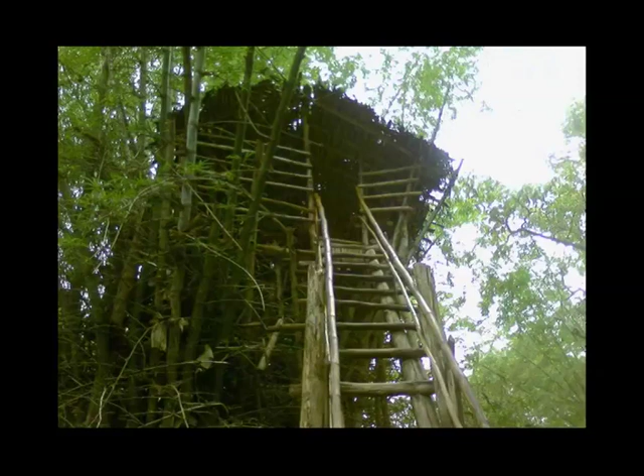So the first section is about why we need bioclimatic design to design green buildings. I'll start with the question: which of these buildings are the greenest? I've got a series of huts. They're all made with very local materials. They use very little energy because generally they have very little heating, if any. They've been made with local staff, so I think they're relatively green buildings.

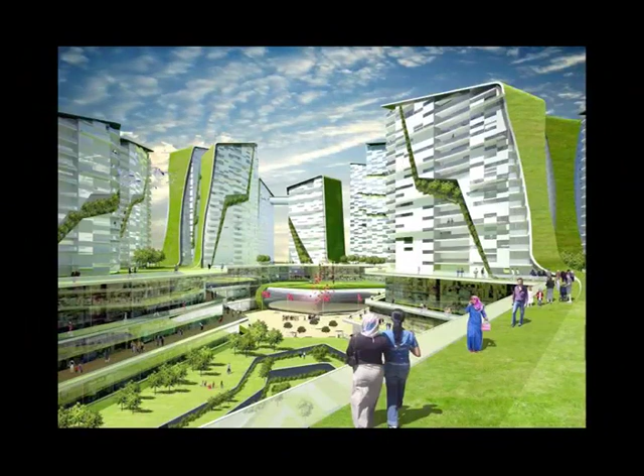Then I've got a series of buildings designed by my boss. These are skyscrapers. They're bioclimatic buildings, so they are very well shaded, very well lit, and they use little energy. This is a building in Singapore. And this is a competition. It hasn't been built for obvious reasons, but it's a sort of theoretical exercise, I would say.

Then we've got another series of buildings. Well, actually, I've just got one. This is a nuclear bunker in the north of England. And one could say that it's actually quite a green building because it's made essentially, except for the air conditioning systems inside of it, of natural materials; it's covered with green roofs.

So does anyone know which one of these buildings is the greenest? No? Well, it's the huts. And the reason why it's the huts is partly, of course, that they use very little materials. It's only local materials, but also there's very little heating, ventilation, and air conditioning in them.

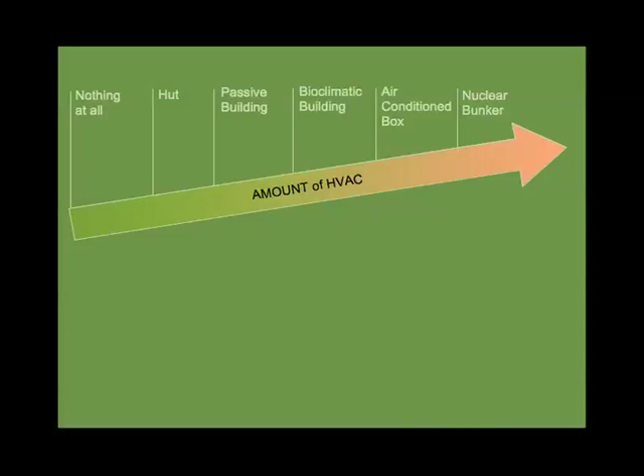So if you go on this scale from the left to the right-hand side, on the left you've got nothing at all. So imagine maybe in Thailand on the beach and there's no building. Then we've got the hut through the passive building. The passive building doesn't have any heating or cooling. The bioclimatic building, which I believe is the next step, is a building which is air-conditioned and which has heating and ventilation, but which is made in a way which is going to reduce its own energy use.

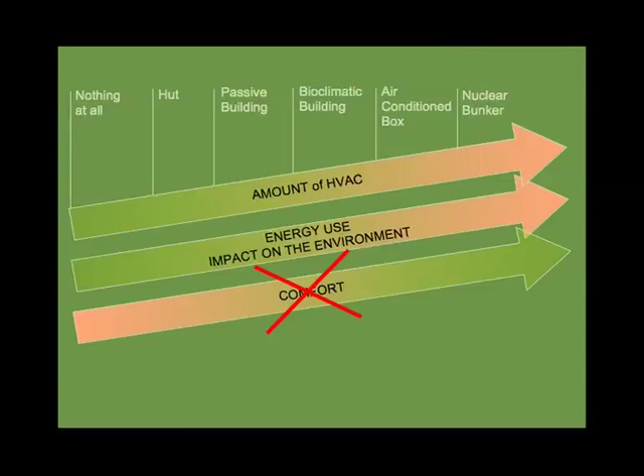The next step is the air-conditioned box; a lot of buildings in Dubai are currently being built like that. And finally, we have the nuclear bunker, which has probably the most heating and air conditioning that you can ever imagine. So the more you go towards the right, the more energy use you get. But one could say, well, if you get more energy use and better ventilation, etc., then it should be more comfortable. We think that it's not the case, because if you're in a bunker or in a glass box, then you're probably not so comfortable.

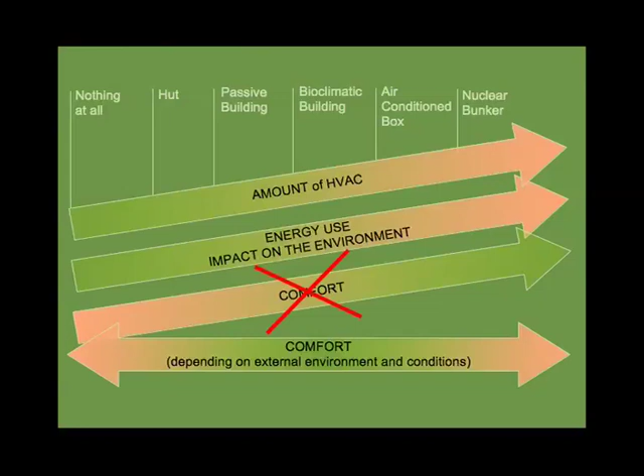So we're not only talking about energy saving when designing a bioclimatic building, we're also talking about buildings which are comfortable, which are healthy, and good for the occupants. Therefore, more valuable. So now we're going to go through the principles of bioclimatic design, and Maria is going to present on this.

One of the things that the presentation begins with is the definition of the bioclimatic design. You will allow me to sit, please. Right.

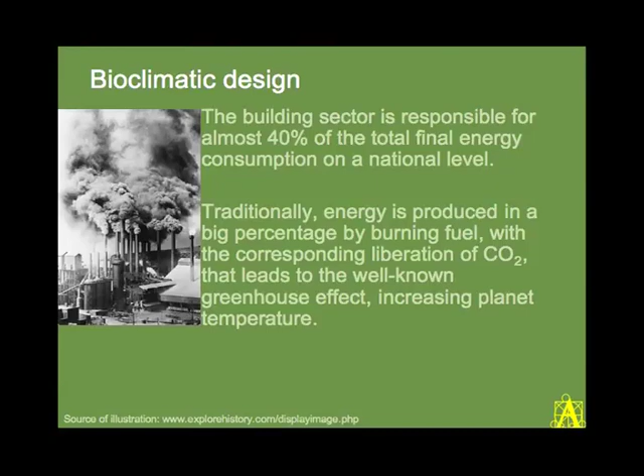What is a bioclimatic building? And why do we deal with them? One of the reasons is that the building sector is responsible for almost 40% of the total energy consumption on a national level. And energy was produced by burning fuel, and you can see the image, which is rather horrid. The corresponding liberation of CO2 leads to the greenhouse effect.

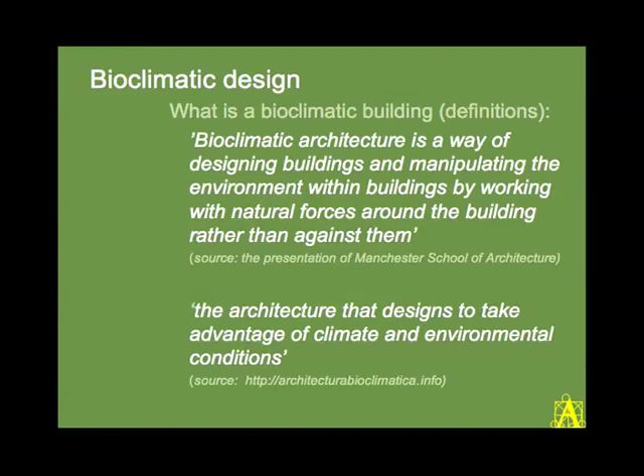We begin with two definitions of bioclimatic architecture. It is a way of designing buildings and manipulating the environment within buildings by working with natural forces around the building, using them, actually. It's from the Manchester School of Architecture. Architecture that designs to take advantage of climate and environmental conditions is another definition that I really liked.

And what is very interesting in almost all building technologies and systems is that we don't really discover them now. Actually, we rediscover them now, because in antiquity they existed. The Greeks had their houses oriented towards the south. Socrates lived in a solar house. Aeschylus said that you have to be stupid to live underground. Well, actually, we can have a discussion here, because underground buildings are very comfortable and very modern today in many respects.

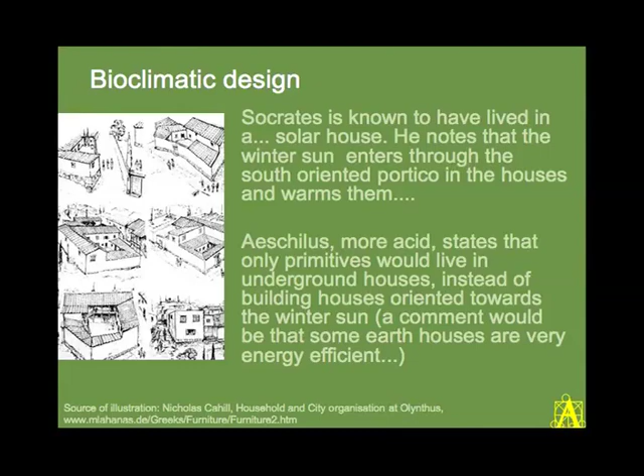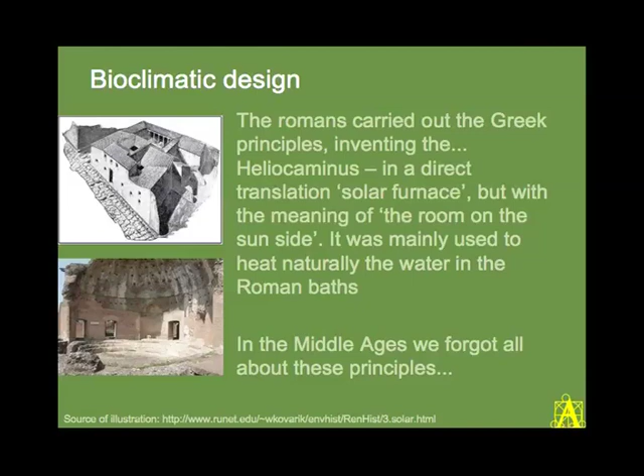Going a little bit further, the Romans carried on the Greek principles with the heliocaminus. A direct translation would be a solar furnace. Actually, they were heating their water for the baths. We forgot about this principle in the Middle Ages and reinvented it in the previous few decades.

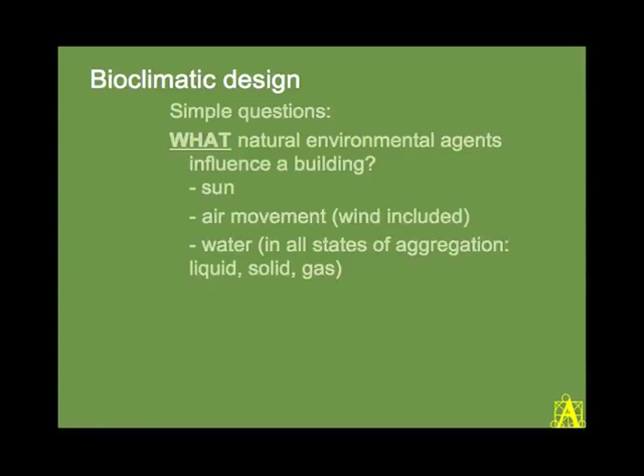So what natural environmental agents influence a building from the bioclimatic point of view? Sun, air movement with the wind, water in all states of aggregation: liquid, solid, and gas. We have to build using them and helping ourselves with the benefits that these environmental agents bring us. Also, vegetation, plants and animals help us.

So you have all these presentations within your folders, so I can gallop through the presentations because it's a very dense day.

Sun, air, movement, water, and biological agents, I said, with their advantages and disadvantages: health, hygiene, natural ventilation, which again means health, natural cooling, which again means health, health brought to us from the plants, and in all the first three situations, we help ourselves to the natural energy that can be produced by using these agents. And of course the disadvantages, because we have the thermal discomfort, we have storms, we have floods, we have deteriorations in all the cases of

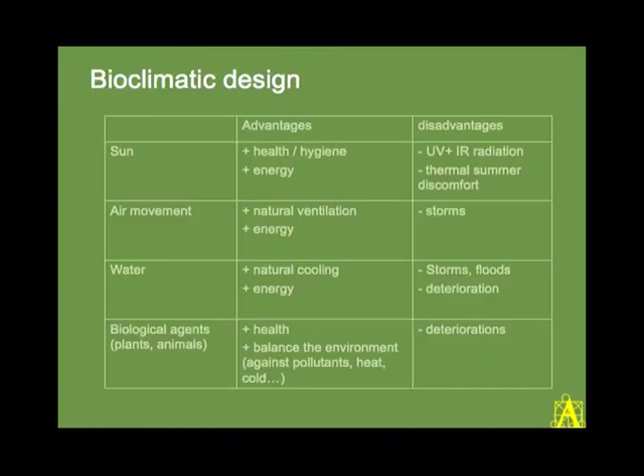misuse of these agents. And so, sun, air, movement, currents and winds, water, landscape, vegetation, all determine the location, the orientation, and the geometry of the building. The building's position, orientation, and geometry should be determined by these agents, using them for us and not against us. The architecture has an influence over the energetic performance of the building; the geometry of the building and of the envelope, and the building materials and structures determine the thermal behavior of the building.

The images that I have taken, and you can see the source of illustrations, are very explicit. You can see how a building can be built in the vicinity of vegetation. You can see how the wind passes over and not through the building. You can see how during the winter time, sun goes in the house through the leafless branches, and during the summer, how the shade is protecting the building against the sun. You can see how the accumulated heat during the day is given back during the night to the environment.

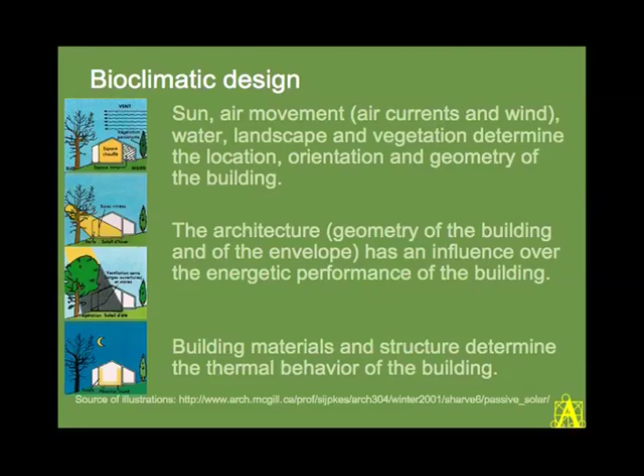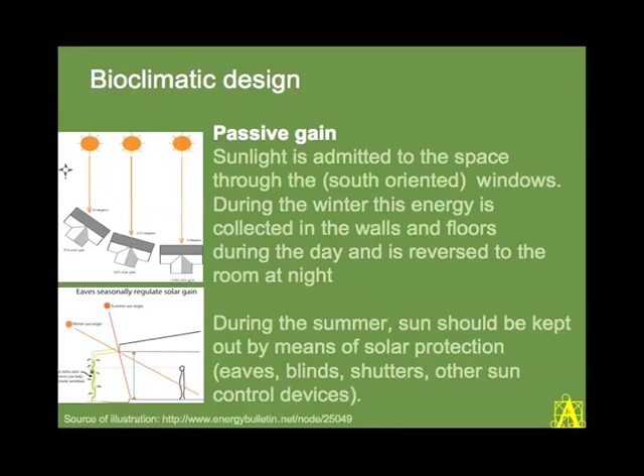Passive gain. Sunlight is admitted through the south-oriented, mostly sun-oriented windows, and you can again see the positions of a utopic building. During the winter, energy is collected in the walls and released at night. During the summer, sun should be kept out by means of solar protection, and in a very simple way, by just drawing the two rays that represent the winter sun angle and the summer sun angle, you can actually design in a most simple way the solar protection for the summer and the possibility of entering the sun during the winter.

And of course, I couldn't resist the temptation of showing that actually vernacular architecture, and from there on even civilian architecture, Romanian architecture, because we have this workshop here, has always used, and not only Romanian architecture, all the vernacular architecture uses principles of bioclimatic design, because they had to build with the nature, not against it. The use of passive systems is the most efficient way of taking advantage of natural resources.

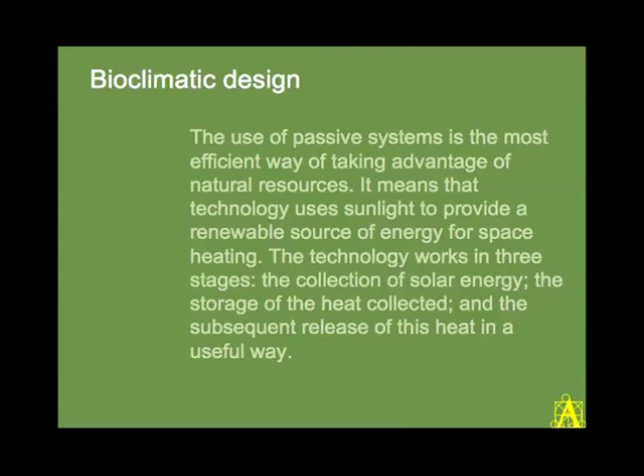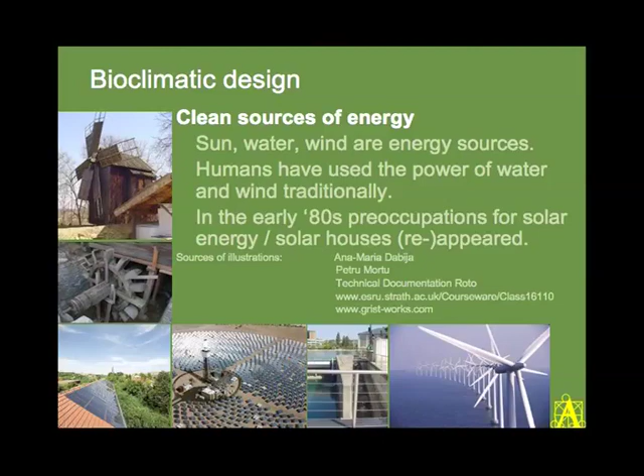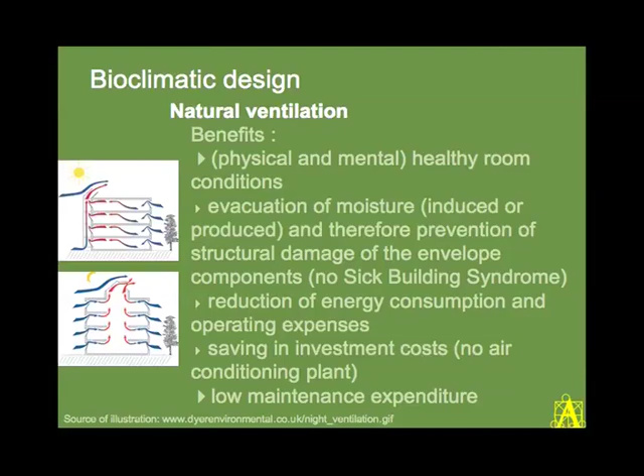Technology uses sunlight to provide renewable energy, and the way the technology works in stages you can find in the slides. Not exactly bioclimatic design, but I did say that we use water power, solar power, and wind power in order to produce power. And we can see them here in the slides in the traditional and in the contemporary way. About natural ventilation, the benefits are physical, mental, and more about natural ventilation will be presented. So this slide is just a flavor of something that's going to come a little bit later.

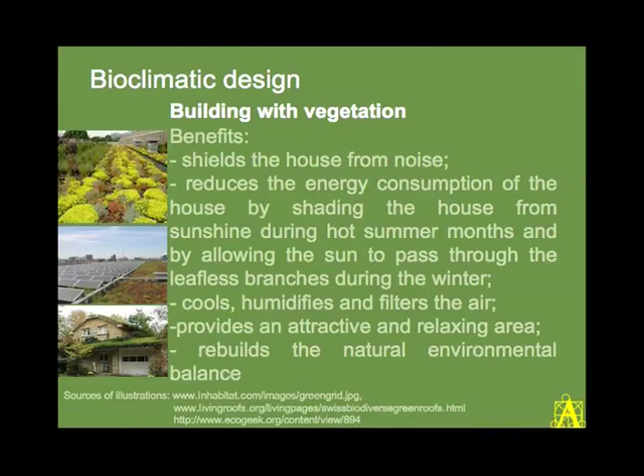But building with vegetation brings a lot of benefits: shields the house from noise, reduces energy consumption of the house by shading the house, as I mentioned before, cools and humidifies and filters the air, provides an attractive and relaxing area. I would very much like to have a coffee in the first slide's location. Rebuilds the natural environmental balance, logically, because it brings back the plants and the small animals that were in that environment.

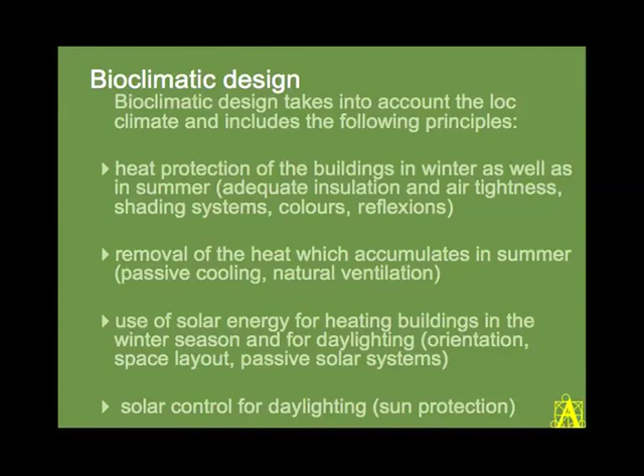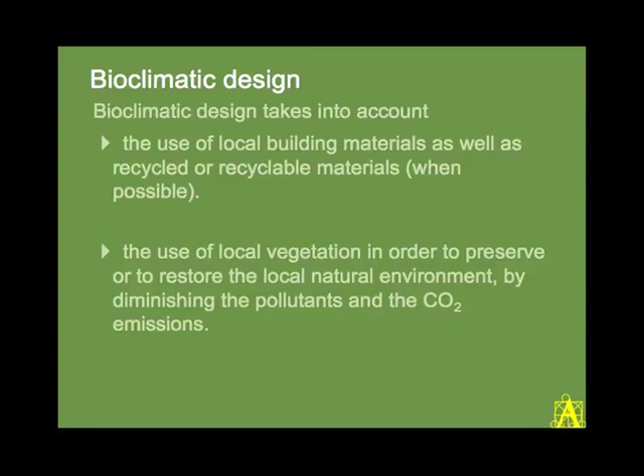Bioclimatic design takes into account local climate and includes the following principles: heat protection of the buildings in winter as well as in summer by adequate insulation, air tightness, shading system, colors, reflections. Removes the heat which accumulates in summer by passive cooling and natural ventilation, uses solar energy for heating buildings in the winter season and for daylighting through orientation, space layout, passive solar systems, solar control for daylighting, sun protection, the use of local building materials, which is very important, as well as recycled or recyclable materials whenever possible, the use of local vegetation in order to preserve or restore the local natural environment by diminishing pollutants and CO2 emissions.

So in conclusion, bioclimatic architecture is an evolved version of popular architecture, vernacular architecture, accomplished with contemporary means, which means building techniques, advanced energy concepts, and modern mechanical devices. This is a scheme, and thank you.

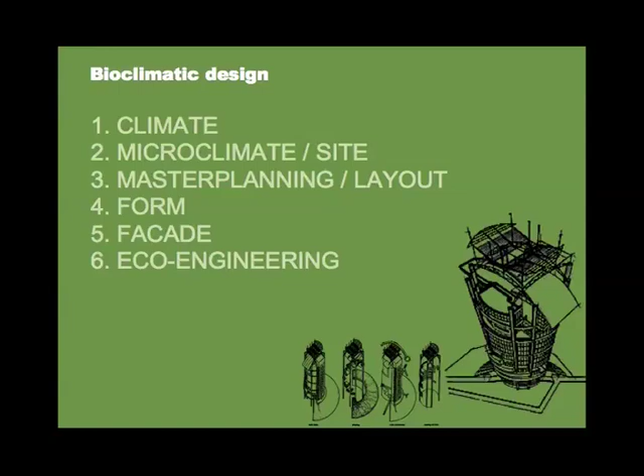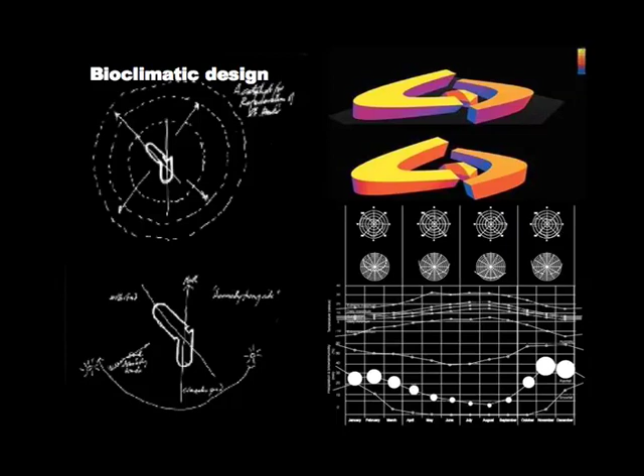Then we do some shape studies, some form studies. And the final thing, we might do a little bit of simulation of how much sun we get on the different parts of the facade or how much wind arrives on the facade, to understand in more detail how our building behaves. That happens last. The first thing we do is look at the climate locally.

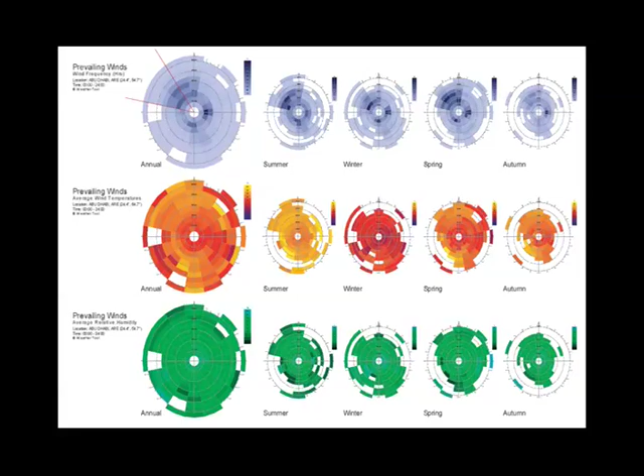In this particular case, the result was that there is probably not such a strong relationship. The second line here looks at direction of wind and temperature; the darker it is, the hotter it is. We saw there wasn't really much relationship between wind temperature and wind direction. It's not the case everywhere; it's very different in the UK, for example. The one at the bottom looks at relative humidity and wind direction. In many places you may have northern winds being colder, and you might want to take advantage of that so your building catches that cold wind when it's too hot.

These are further studies. All these studies have been done with a software called Ecotect. That's the one we use in our office. You might want to investigate other tools; it doesn't really matter what you use. I quite like Ecotect because I think it's quite a complete tool. It does everything I need at the early stages of a project.

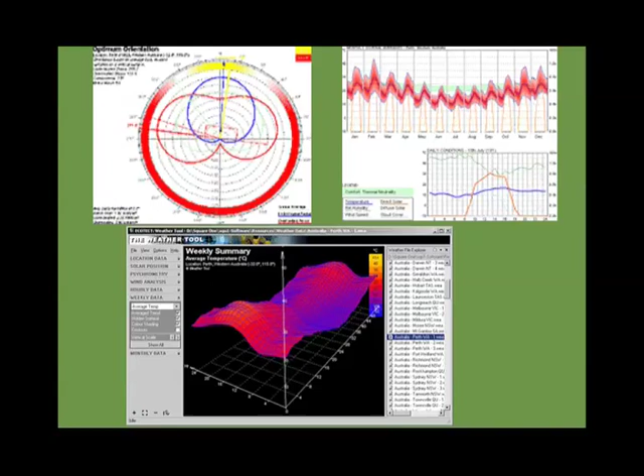If I'm going too slowly, please look really bored or do something that indicates that you know all of it.

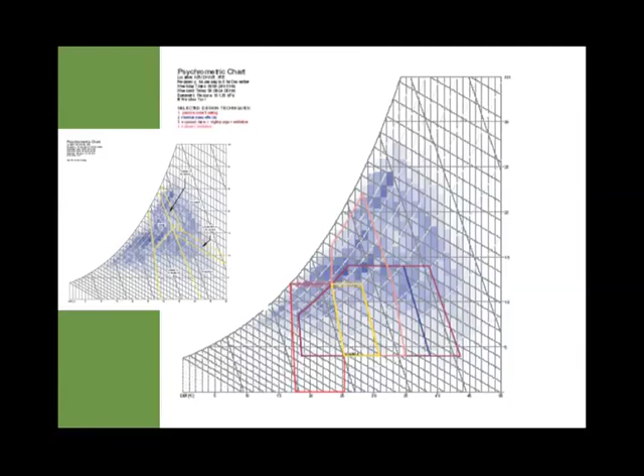So to be able to get climate information, there's a variety of sources, as well as many of the software that we're using, and this is just a few of them.

I don't want to do advertisement. If you investigate, you will find there's a lot of other types of software that can be used. But the software that you can use to do building analysis always tends to have climate data, climate information. It might not have climate for the area which you want to study.

And if that's the case, you need to go to the Department of Energy website, the American website, which has an unbelievable amount of information on climate, and it has all sorts of climate files that you can download for all around the world, really.

Then there's another software which is called Meteonorm. Meteonorm is very useful. The software itself is geared to do climate analysis, so that's the only use of the software. What it does is that it has a database of information on climate data for different areas around the world. But if it doesn't have certain information about a certain area, it kind of

averages the areas around it, which you've got to be very, very careful about, because of course, if you're looking at wind data and you have a large mountain near your site, you don't really want average information between two different sites. What you want is the specific location which you're studying. So I think Meteonorm is a fantastic software, but it's important to be quite careful.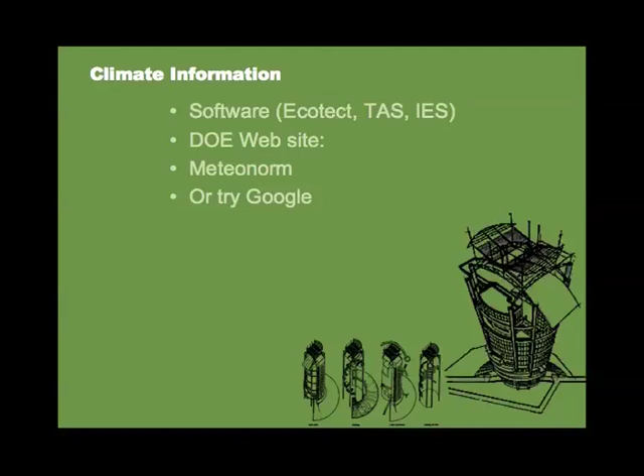There's also very often information about local particularities, like local winds that may exist. For example, we have some very interesting winds occurring in the Middle East, and I found out about that on Google. So Google is a very good source of information, I think, or any search engine.

So this is my health warning when dealing with climate analysis. It's important to check the source of the climate data. It's very important to know where the information comes from and whether it's a reliable source. The second thing is it's important to be very careful about wind data, especially if you're using any kind of software which is going to average the two locations around it and calculate wind data from it, because that means your wind information might be really wrong.

The other thing is that it's important to understand what kind of climate information we're dealing with. Oops, this is not going well. Sorry. If you take a data file, it's going to have hourly information on climate. But it could be for an average year, or it could be for a very hot year. So there's different types of file. I think it's very important to be aware of what kind of information we're dealing with.

If you have background information that tells you that it's an especially hot summer year, which some information is actually taken for that purpose, then it might be safe information to use if you want to design for summer natural ventilation. If you have an average year, then maybe that's a good climate to be looking at for evaluating energy use of your buildings.

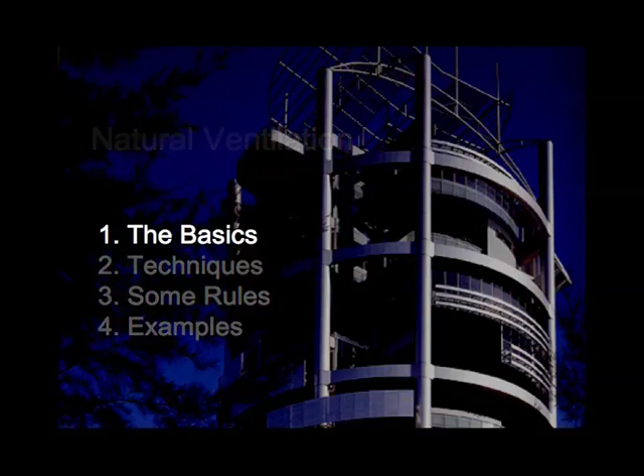So this is a slightly separate talk. I'll talk through the design of naturally ventilated buildings and natural ventilation. So why natural ventilation? Why ventilation? Obviously, it is to get fresh air, to remove smells and pollutants, and to cool down buildings. This presentation is going to be a little bit long.

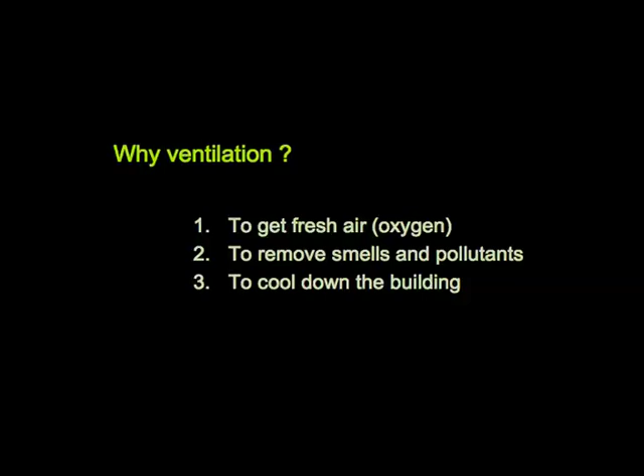So first, I think Anna Maria went through that a little bit earlier, but the advantages of natural ventilation are, of course, that it's low energy. It's a very simple system. What is simpler than just opening a window? It tends to be cheap, although if you start having very complicated controls to automatically regulate the opening and closing of your windows, suddenly it gets quite expensive.

It tends to be low maintenance. Again, if you start having automated controls controlling the opening and closing of windows, then it can get a little bit high maintenance. And it's quite healthy. It's really healthy to have direct contact with the outside air.

The disadvantage is that it's not so reliable. I think from the point of view of an M&E designer, of a building services designer, it's not a very comfortable thing to be telling, say, your client that your building is going to have a variable temperature inside. And it's difficult to guarantee that high temperatures are not going to occur very often inside naturally ventilated buildings. I think it's a very high risk because you don't know exactly what the temperatures outside are going to be in the next 5 years, say.

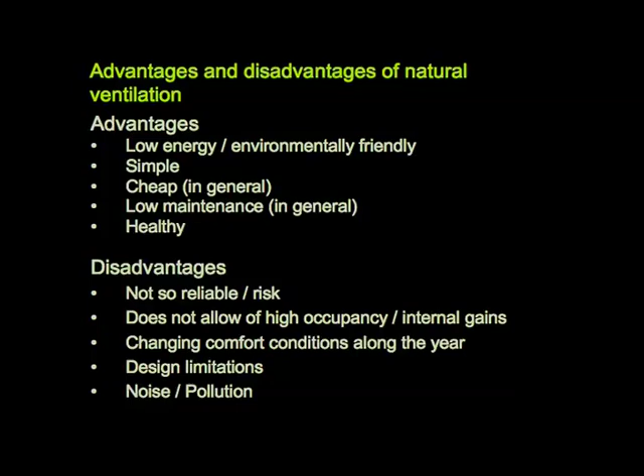And of course, noise and pollution. If you open the window to the outside, then you're going to be more affected by noise and pollution directly outside your window. It's quite obvious. Although, again, there are ways of dealing with that. There are certain systems that can be used to prevent noise and pollution from getting inside.

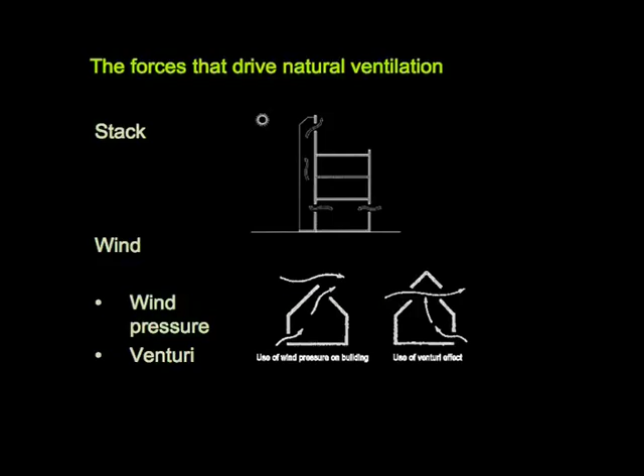So I'm going to go through the main types of natural ventilation, and this is very simplified. Really, there are two different forces that drive natural ventilation. There's stack, which is heat-driven, and then there's wind. And there are two ways to get wind. There's directly through wind pressure, so the wind gets straight into the building, and the other effect is through venturi, where there's a suction effect which is used to drive the ventilation. So these are the main types of natural ventilation. There are variations, and there are systems that use two or even three of them together.

So the most simple way to naturally ventilate a building is through single-sided, just a window on the side of the building. Then the more effective way is to have a window at the bottom and at the top, because then you're taking advantage also of the stack, of the difference in air pressure due to the temperature.

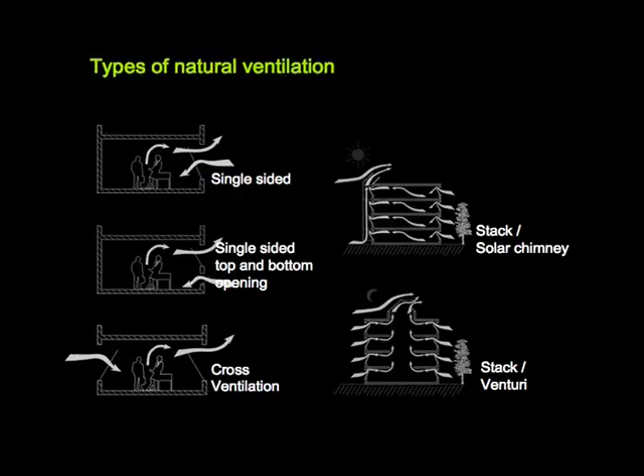Then cross-ventilation, and then you can start having more complex systems with, for example, a mix of stack with a solar chimney, which is a chimney with a glass front, maybe. And then you can use internal atria kind of shapes, which actually use stack, venturi, and a little bit of wind pressure.

So this is an example of a solar chimney. The building on the right is in the north of England, near Nottingham. This particular system is using a glazed area to absorb solar energy to ventilate the building. Now, I've got my doubts about how that works, actually. It's funny, I'll go through another building quite a lot towards the end of the day, which we've designed, that's got a solar chimney on it.

The problem with a solar chimney is that if the surface of the glass is really cold, then the air actually falls because it gets cooled and it falls inside the solar chimney. So the chimney sometimes doesn't work so well. So very often these solar chimneys need a fan, which means that it's not quite natural ventilation anymore, so they're cheating. But it is possible to design them properly to make them work.

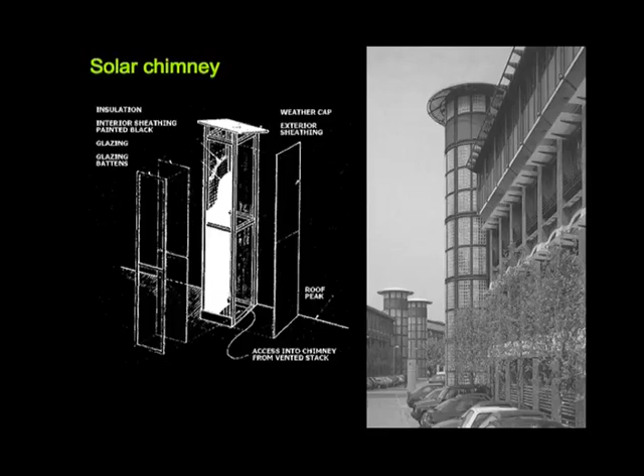But to be able to make them work, I think it's very important to be doing a full simulation, or proper testing, to be able to understand whether the system is going to work. So generally, what's used is a CFD, computational fluid dynamics simulation, which I'll explain a little bit more later, to see if that kind of system works.

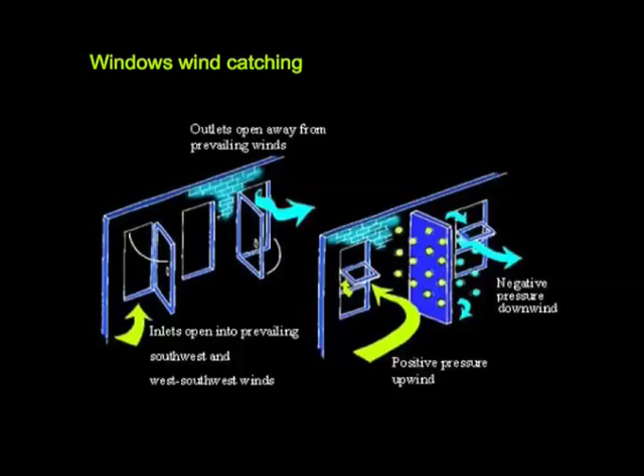It's a very simple system, but if your wind consistently comes from the side of the building as opposed to straight in front of it, you can build these little wings that are going to catch the wind and enhance the natural ventilation inside your building. But to know whether that's necessary, it's important to know where the wind comes from, which is why your climate analysis was so necessary.

These particular systems, again, to understand whether they work, I think it's very important to do very detailed studies, because they don't always work. And the tools used to evaluate their performance are computational fluid dynamics tools again.

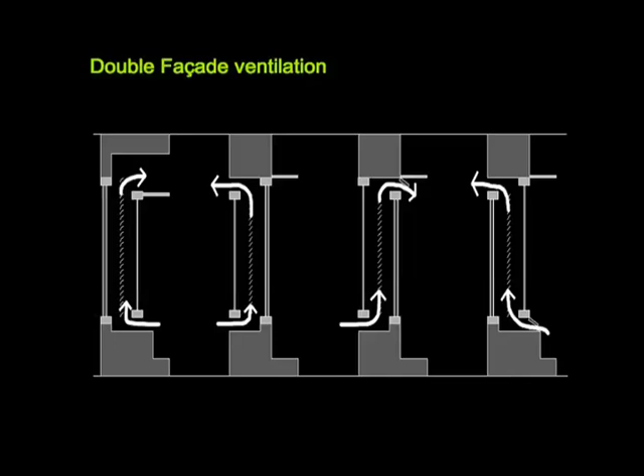So now I'm going to go through some rules for designing naturally ventilated buildings. So, as I was saying earlier, the problem whilst designing naturally ventilated buildings is the internal loads inside the building, so the amount of energy inside the building. So it's important to make sure that if there are important internal gains, like if you have a printer room, then you might want to isolate that printer room and have it in a corner which is actually air conditioned, so that the heat from it doesn't come inside the rest of the building.

So this is an example, but it's very much part of the way a naturally ventilated building is designed. The different rooms and the different users are separated, not just through their function, but through their thermal behavior, how much heat gains you have inside them. Low energy everything. So you need to have low energy lighting. You need to have low energy screens for the computers. And sleepy people as well. But you need to have low energy systems inside your building so that you keep the internal gains as low as possible.

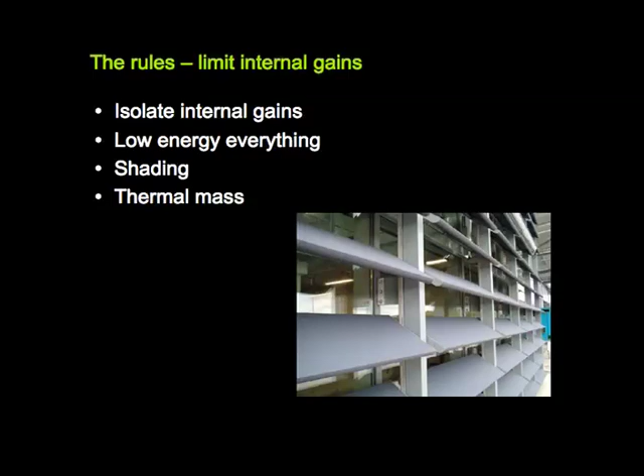So when designing, again, a naturally ventilated building, it's important to keep in mind what the window is going to be like. Because if you need a certain area of window opening, a certain opened area, that's not the area of the window. That's the area of the open bit of the window. Even though there's actually some other coefficients that should apply. But I think it's a very silly thing, but it's how many naturally ventilated buildings fail. It's because this little detail is forgotten about.

Another thing is, if the building is ventilated at night to cool it down, the opening of the window needs to be thought about very carefully, because there might be some safety issues, so people don't do silly things like throwing themselves outside the windows. In schools, for example, in hospitals, in the UK, I don't know about here, there are limits as to how much you can open a certain window. You can only open it, I think, by about 10 centimeters.

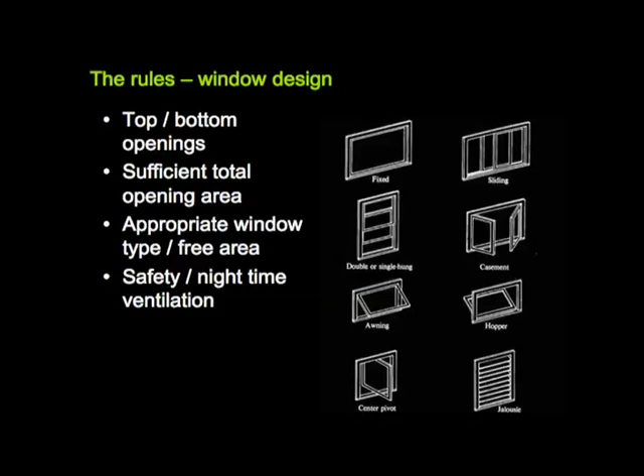Sorry, I just forgot something. To be able to get this effect, of course, you need to avoid carpets and false ceilings because that's going to cover the thermal mass and your building is not going to cool down as effectively.

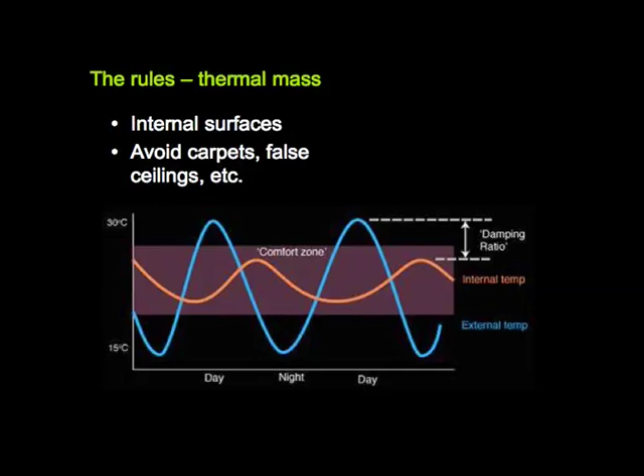If you have a top and bottom opening, then the ventilation is more effective. Then the width shouldn't be any more than 2.5 times the height. And if you have two side ventilation, one window on each side of your room, then the width shouldn't be any more than 5 times the height. So these rules basically are what sort of govern the form of naturally ventilated buildings.

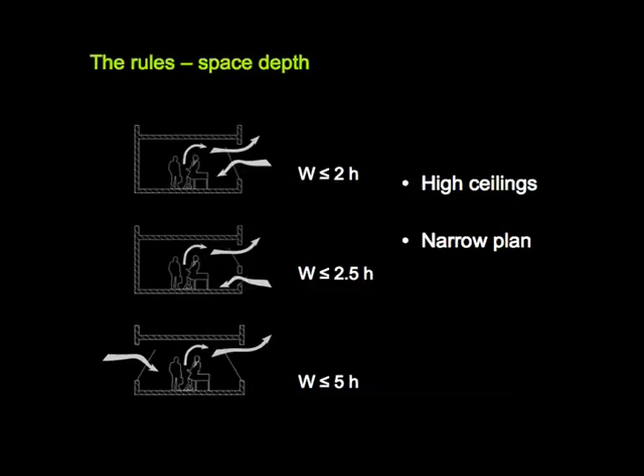What's important to notice here is that the higher ceilings you have, the better. And also it makes a very nice feeling to the room. But the higher your ceilings, the more the natural ventilation is going to function. The other thing is that you're going to end up with quite narrow plans, which is why in Germany many office buildings have narrow plans, so that you can allow for good daylight and good natural ventilation.

The wind-driven natural ventilation is slightly different, of course, at high levels and at the bottom of the building. So if you have, say, a high-rise building, then you're going to get a lot more air through wind-driven ventilation at the top than you get at the bottom. It's quite obvious, but in theory, if you have a naturally ventilated building, it should result in smaller windows at the top than at the bottom.

The thing is, very often buildings are not designed for wind-driven ventilation. They're designed for a ventilation which is only driven by stack, by temperature difference. And we do that because it's a safe thing to be doing.

Another important thing is that the wind speeds are going to be very different in cities than they are in open land. You get more wind at the bottom in open land than you get in cities. The wind is very slow down at the bottom in cities. And that's quite useful to know as well when you design wind turbines.

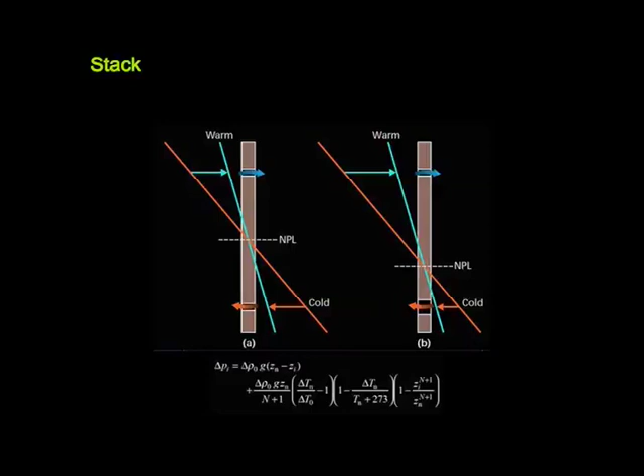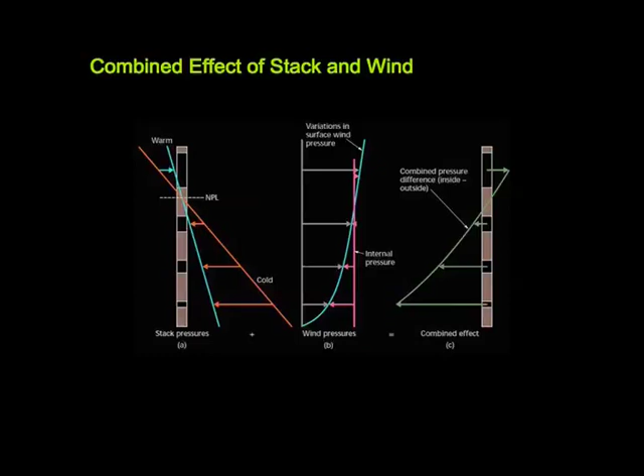I won't go through this too much, but the general idea is that there is a kind of neutral pressure point that occurs, and through evaluating the pressure differences from top to bottom at different levels of your facade, through both stack and the use of wind pressures, you can evaluate what air movement and what air quantity you can have inside your room.

So I'll go a little bit through some important design thoughts. Here we've got a building which is naturally ventilated through an atrium. So using stack here and using a little bit of venturi effect. And so if the wind comes from here, we're going to get high pressure here, negative pressure here.

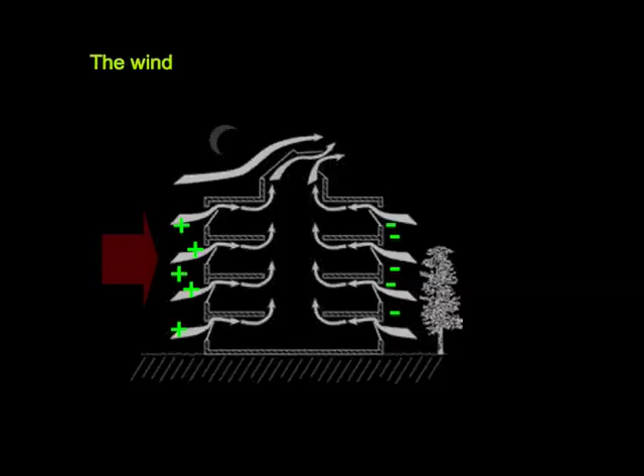The thing is that many buildings are being designed like that, but it's important to be aware that if the wind is very strong, then what might happen is that actually you don't really get what you want. You get air coming straight through your building. And that only happens if the wind is strong. Now, I don't think that this is a problem, actually, because this, without the wind and with the stack effect, is a kind of worst-case scenario.

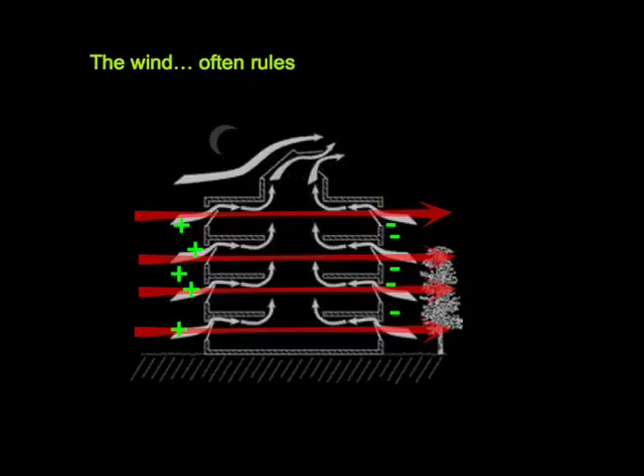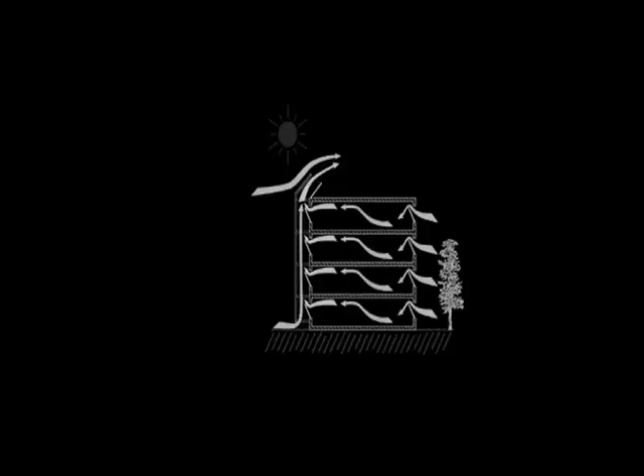It doesn't really matter so much if at some times the building doesn't function the way you want it to. But it's important to be aware of it, because you might want to have a different window opening and closing regime, and in terms of the way you're going to simulate the building, maybe you're going to think slightly differently. This is another case. So I'm sure you can get what's going to happen now. The wind comes from here, what's happening?

Well, you get a positive pressure on here and a negative pressure on this side. And it might be that some air gets through the wrong direction and it's harder for the wind to get up there. This is a bit more of a problem because it can actually prevent your building from functioning.

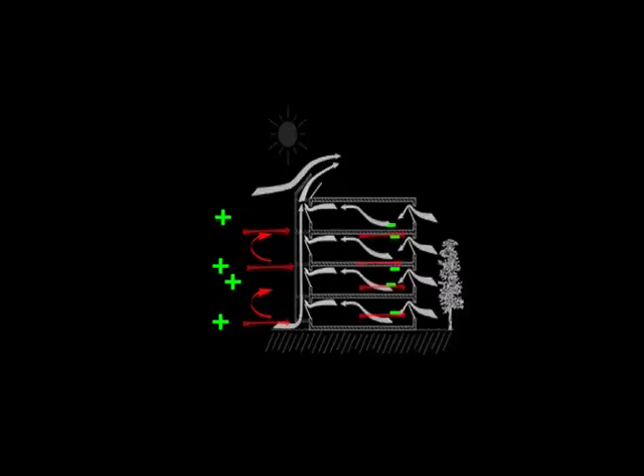So I'm going to go through some examples of buildings, some of which I've been working on, some of which we haven't been working on. This is a building that Ken Yeang has designed. It's a bioclimatic building. It's got a completely different shading system on different facades of the building. Sorry, I should have said this is in Malaysia, in Kuala Lumpur. And what's interesting, it also has natural ventilation inside it.

Now, it's quite a famous building for its natural ventilation, but being in Kuala Lumpur, you would imagine that natural ventilation is only limited to certain types of space. So this building has mainly the core and functional areas naturally ventilated. So all the office areas are generally air conditioned most of the time. I don't think that's a problem. I think it's a very good thing to have some of the areas that are naturally ventilated and some which are not.

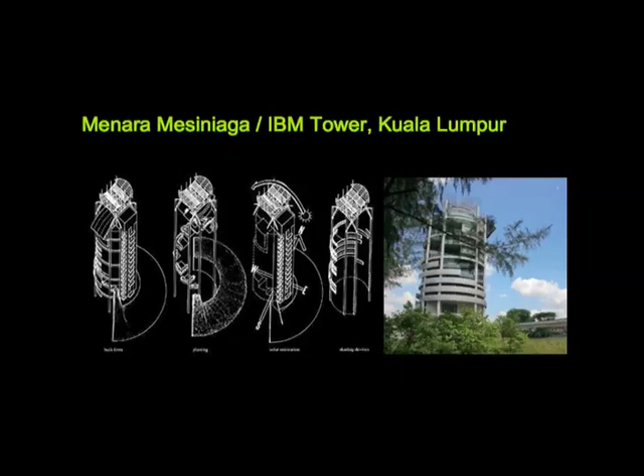You just put natural ventilation in areas that can accept natural ventilation. It's not necessary to have the whole building. So cores, staircases, etc. don't need air conditioning all the time, so it's possible to do that.

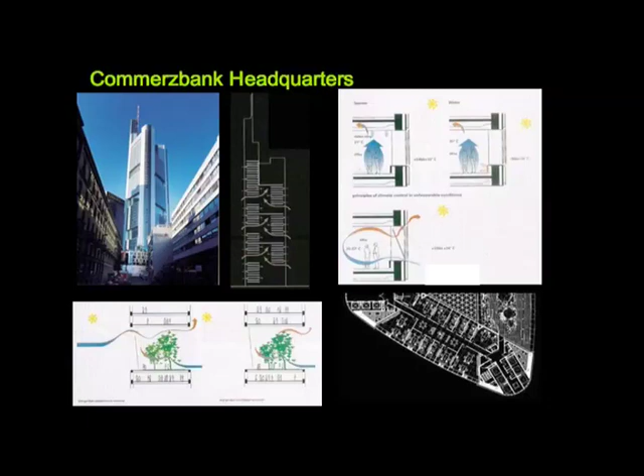This is a relatively famous building, which I'm sure you've heard of. This is a quite complex, well, also not so complex system of natural ventilation here. What I think is quite interesting here is that there are internal gardens, which are also naturally ventilated. And one thing which I should actually mention is, if you look, despite the quite deep internal spaces here, the actual depth is not so much.

This is a building in the UK. Now they've done something quite nice. It's classrooms. So classrooms and any seminar areas or any areas where there's a lot of people coming in at the same time are generally very difficult to naturally ventilate. And so this particular one has a system by which the air is being evacuated from the area just underneath the roof. The air comes in here.

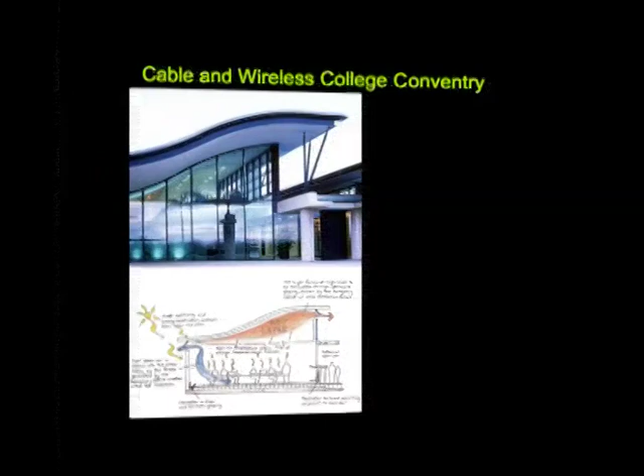Because it's cold, it's in the UK, remember? The air falls down inside the classroom. The people heat up the air, it goes up to the area just underneath the roof, and there's a ventilation area just at the top. I went in there, it's actually nice and comfortable.

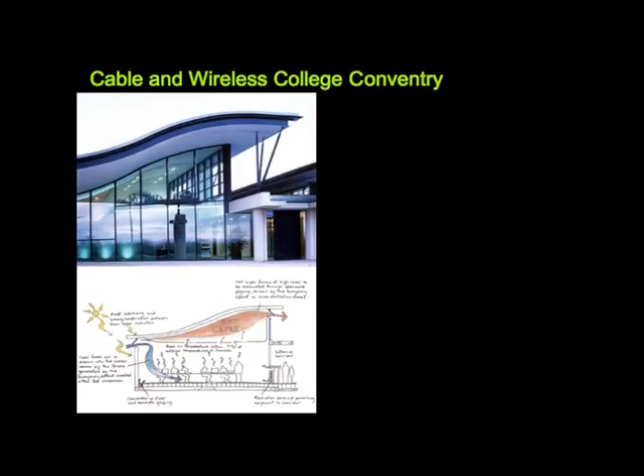And so the other thing is the roof area here, because of its orientation, acts as some form of solar collector. So the roof itself is going to heat up a little bit and help in rising the air and getting rid of the air here.

This is one of the buildings I've worked on the design of. The problem with this one is that it was a lightweight building. It's timber and it's all lightweight materials, which means that there's no thermal mass. If you ventilate at night, it doesn't cool down. It stays at the same temperature. And so I had a very big problem because there was quite a high occupancy of people. And we didn't want to use air conditioning in there.

So what we did, first of all, I'm sure you would have noticed that the shading system is quite substantial. So this is just to prevent heat gains inside the building. They're also quite a light color, which means that the light will come inside the building quite easily.

And inside here, these blocks here that you can see are connected to an internal atrium kind of space. And the wind was coming almost only from the two sides of the building. It wasn't coming from the flank here, it was coming from the front and from the back. So these things here, they open and close depending on the wind direction.

This is a rather famous naturally ventilated building. I'm not sure about this. I want to visit it as well. I've got a problem with it because it gives a bad name to naturally ventilated buildings in the UK. Architects in the UK don't like the way it looks. And so very often they criticize naturally ventilated buildings as being ugly using this one. So I don't know whether it's ugly or not. That's not my job. I'm an engineer. I don't deal with architecture. But in any case, I know that it's been given quite a dodgy reputation.

The problem they had is that they wanted a deep plan building. They couldn't design within the limitations which I was mentioning earlier. So the depth of the building here was compensated through the use of extremely high stacked chimneys, you can see this one here, to be able to create a sufficient force of air being drawn from the bottom here. Now, when we do that kind of thing, you can break the rules of thumb: 2 times the height if you have single-sided ventilation, or 5 times the height if you have 2-sided ventilation. So if you do stuff like that, you can definitely break the rules.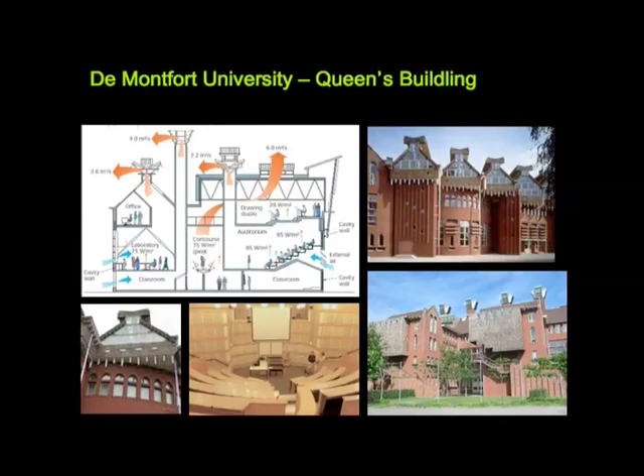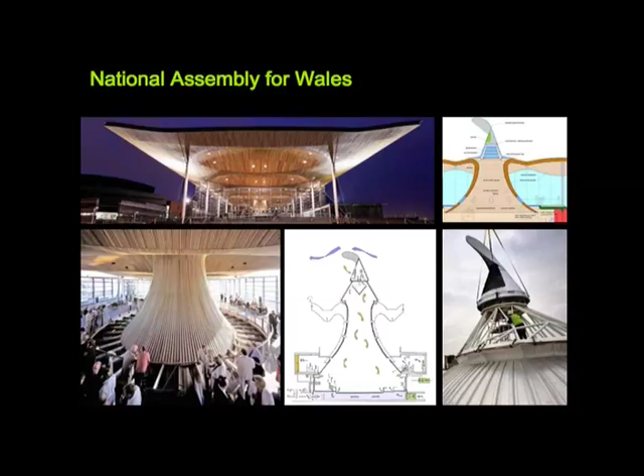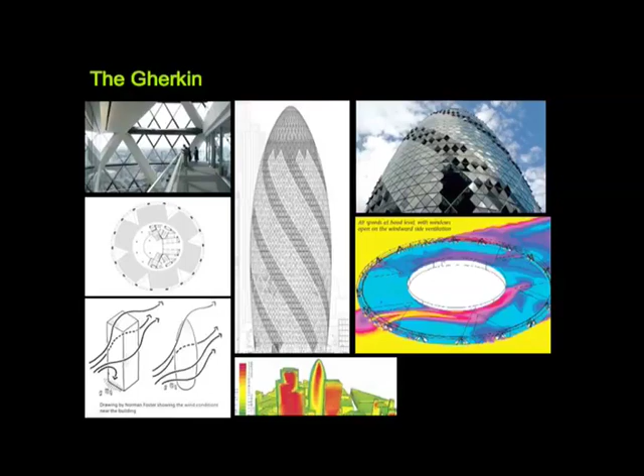Another thing which I forgot to mention, sorry, the whole swirly shape here is actually derived from the natural ventilation necessity, because the air actually swirls around to the top. That's another of the...

So I'll go a little bit through some software. I'm going quite a lot quicker than I expected, actually, so we're a little bit early on schedule. So I'll explain a little bit what dynamic thermal simulation is. Dynamic thermal simulation is used to not only design naturally ventilated buildings, it's also used to calculate the energy use of buildings.

Most buildings now, most large-scale buildings in the UK are designed with a dynamic thermal simulation. I think in the States it's also more and more the case, and many places around the world are starting to accept using this type of tool.

Now what it is, it's a simulation that uses hourly climate data. So the climate information which I was mentioning earlier, including temperature, relative humidity, wind direction, wind speeds, etc., and also solar irradiation, are being used. This information is hourly and is very detailed.

Then the other type of information that's put into the software would be a 3D model of the building. So all walls, including windows, the actual form and shape of the building, and detail on the different construction details of all the different building elements are going to be also entered with their thermal properties. So you're going to have what type of walls you have, and all the properties of the different elements within the walls.

It's the same for windows. You would have the window size, of course, because you have a 3D model, and also what type of glazing you have, what is the U value, etc. Then you're going to enter into the software what type of opening schedule you might have for the windows. So how much do they open and when in the year?

It could be that the information that you enter in there is not going to be when your window opens, but actually depending on what it opens. So you could tell it if the temperature is over 25 degrees centigrade, then we open the window. Or if the amount of carbon dioxide inside the building is over a certain limit, then we open the window.

Now, that means that either you assume that people are going to open the windows when required, or you would have an automatic control, which is more and more the case now with modern naturally ventilated buildings. So you present these actions inside the building, and then the last thing that goes in there is the internal gain schedules. So how many people, how much heat, how much latent heat do they emit, and also the heat from lighting systems, from your computers, from anything that's inside the building.

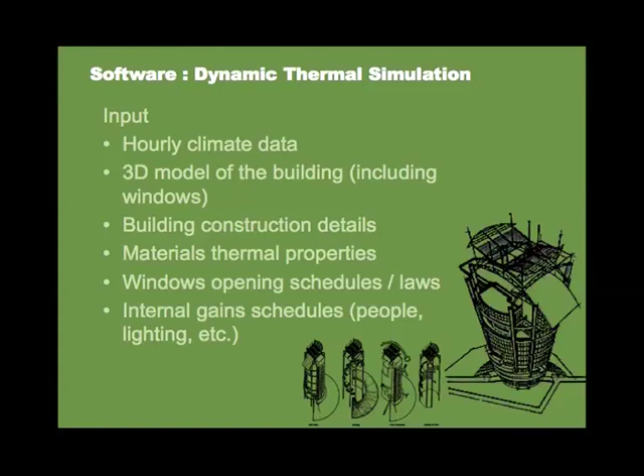So what you get out of it, you get air temperatures. You get also surface and resultant temperature, because of course the temperature that people feel is a result of the surface temperatures around them and the air temperature. We're not actually just feeling the air temperature. We feel what's called the resultant temperature. So you get all this temperature information on an hourly basis for the whole year, so you're going to get a variation of temperature all along the year.

Then you get relative humidity and airflows, the amount of air, although you've got to be quite careful about using those. Predicted mean vote, so the comfort parameters, maybe, to an extent. And very importantly, you might get your energy use. Now, there are certain exercises that you might want to do if you're using the energy use. So maybe you will need to, for example, put a limit to the size of the boiler.

In the input section I didn't go through the mechanical systems, but in certain cases, depending on what you're doing, you can also put some details about the mechanical systems or the building services systems that you might have in your building. If you do that, you can get a more accurate prediction of energy use and peak energy demand. You're going to get the variation of cooling demand and heating demand all along the year for each hour of the year. And so if you have that, maybe you can decide what your peak is.

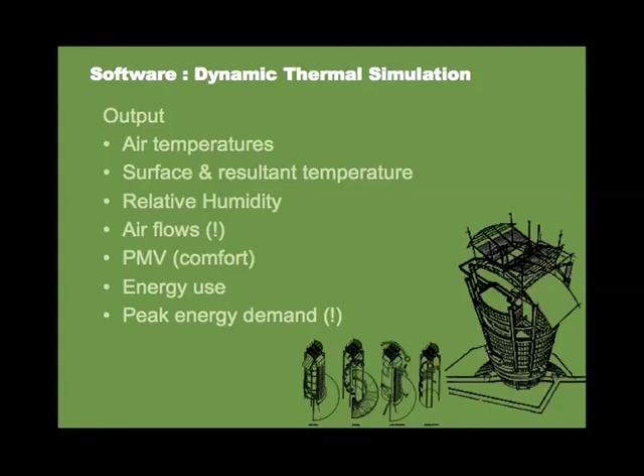Or alternatively, it might mean that in some times of the year you might want to air condition, so you might have a mixed mode ventilation system where you naturally ventilate when you can, and the rest of the time you have an air conditioning system. Examples of applications are window sizing, like I was saying. It's very useful to do an analysis, so you can maybe do a variety of window sizes and try to decide what is the optimum size. So then you would need to have many runs of simulation.

To evaluate the effectiveness of natural ventilation, to see the impact of thermal mass, I think is quite important. One of the questions that's very often asked, maybe if you have an office, is can I have a false ceiling in my office? And then, if you're using these tools, what you can do is you can put a false ceiling inside your building, simulate the building and see what the impact is and whether your building is still functioning the way you want it.

The evaluation of energy use is a very important feature, of course, because then you can evaluate, this is one of the aims of the exercises. So if you have a mixed mode ventilation system, you can play with certain parameters and look at how much impact on overall energy use it has. Nowadays in the UK, we do the energy use evaluation as soon as concept design stage because it's required by planning. So to be able to go through planning, I mean, not everywhere in the UK, but definitely in London, London's mayor is requesting for us to be actually complying with certain energy efficiency limits, and so we have to carry out energy use simulation very, very early on in the design process.

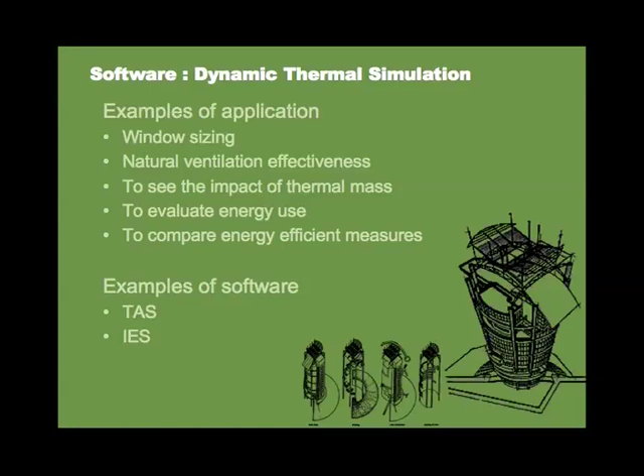Both TAS and IES and any other software of this type, dynamic thermal simulation, which is also called dynamic thermal modeling, DTS or DTM, require extensive training. I don't think anyone could just go onto the software and use it straight away. I think it needs at least a couple of days, and then to be able to use it properly, I think it takes maybe a month, two months of experience to be able to really run with it.

And I don't think it's realistic, if you have a deadline on the design of a building for next month, to be deciding to use that. I think it's important to prepare and to take the time that's necessary to learn. Once it's learned, that's it. Once one software is learned, the good thing is, because they all function according to the same principles, you end up being able quite quickly to use the other software and design with them. But I don't think it's something that should be done in a rush. It takes a while to learn.

So the little picture on the left here is not from my own designs; this is just a completely different building. But this is showing the kind of detail that you get in the 3D simulation of the building. If you look, you have some details of the facade, etc. This, I suspect, is going to be the variation of temperature during the year. Maybe the red bit could be the heating system, for example.

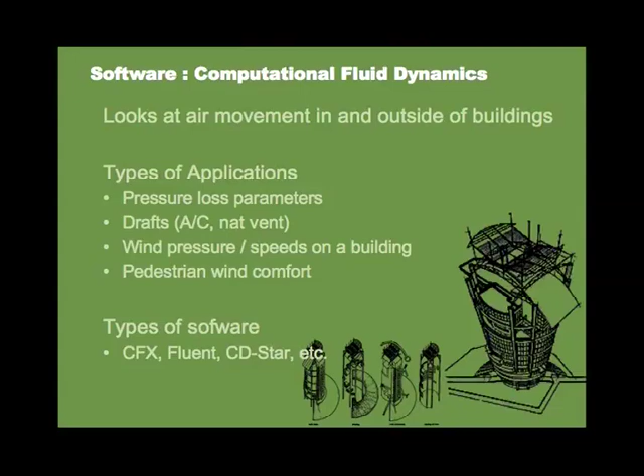It was really interesting for the guy doing it because he was learning a new skill, obviously. But if it's done in a commercial environment, not a research environment, there are always time and cost limitations. And because it's such a specialist area, it's better to give it to the specialist that can do it and do only that. That's just an opinion. Not everybody thinks the same.

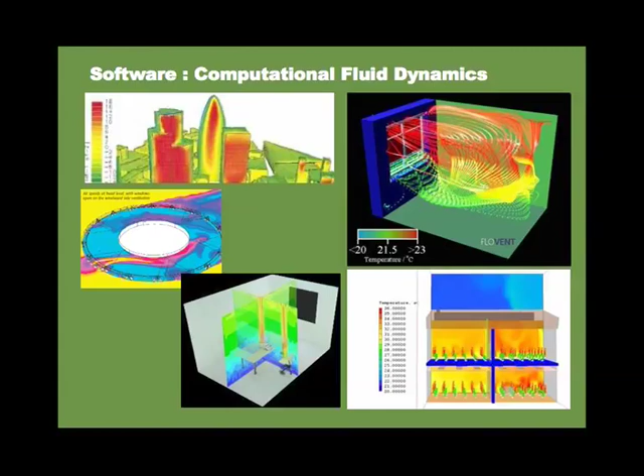This is sort of a cut taken through an office building, which I believe has some form of displacement ventilation. So the air is coming from the bottom and heats up progressively towards the top. They're very useful studies. It's very different to what I was talking about earlier, dynamic thermal simulation, because it only looks at one single time. The problem is that very often you need to look at many times, and so you need to do loads and loads of these simulations to be able to understand what's going on.

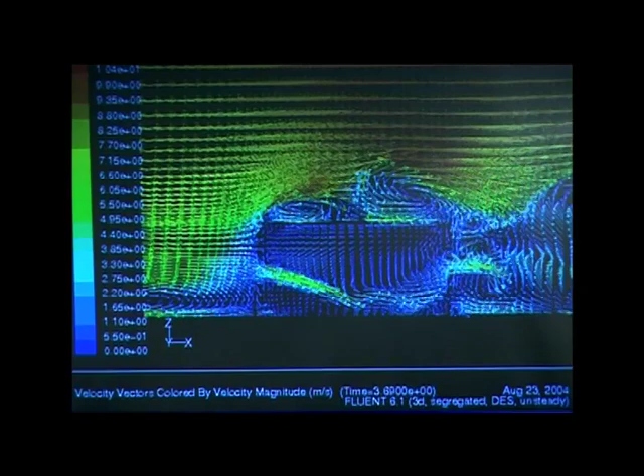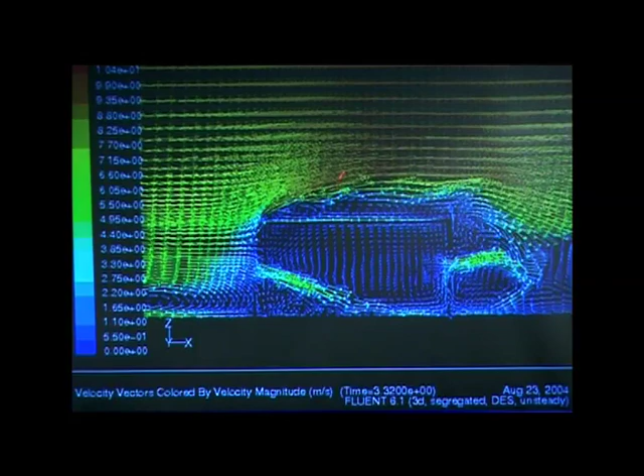So this is the kind of stuff that comes out of this software. As you can see, it's quite useful. Here we have wind speeds, so these are not temperatures, these are wind speeds. So you can see the effect I was talking about earlier, that the wind is higher at the top than it is at the bottom. It's quite obvious. And then you can see the air coming inside, and maybe there's a bit of a draft here. It's useful for understanding drafts.

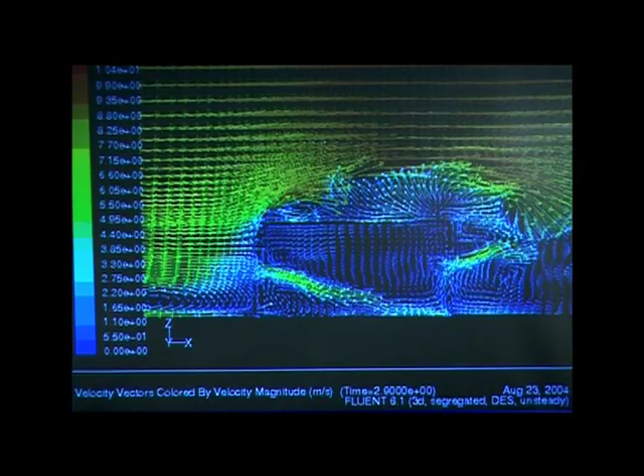And if you want to put a wind turbine on a building, you can see that the plume comes at this point, and that maybe you want your wind turbine to be higher than that. So it's very useful work, extremely time-consuming. It's about the most time-consuming type of simulation exercise that I've come across.

The health warnings I have for this software: training is indispensable. I can't stress it enough. I've been trained for days and days on this software, and I can't do it. Because this is not just about the training itself, it's about the training and the learning phase after that, which takes months and months. So the review is even more important. The problem with reviewing CFD is that it's difficult to find reviewers that understand CFD as well as the person doing the simulation. So it's another reason why I would often prefer subcontracting something like that, because it's safer.

Steady state: it just does one particular state in time. It's very, very specialist. There are problems of accuracy. The software packages perform very differently in terms of accuracy, and I think it has to be considered a very approximate simulation type, because wind is a very difficult thing to simulate. The equations that govern it are extremely complex, and I think it's quite recognized that still today these programs give an approximation of what the wind does. It's not a very accurate simulation.